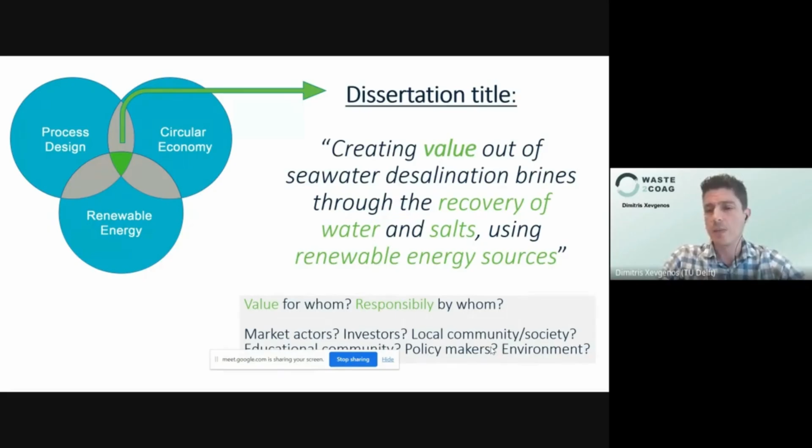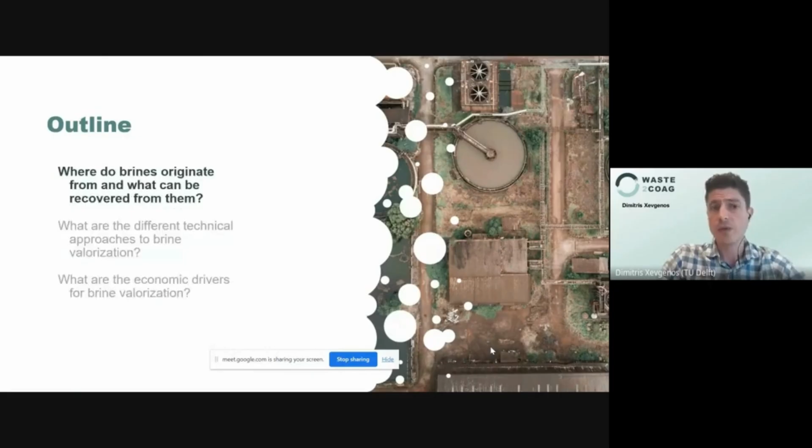Moving now to the outline of this presentation: I start with where do brines originate from and what can be recovered, what are the different technical approaches to brine valorization, and finally, what are the economic drivers for brine valorization.

Starting with the origination of brines, I use here a definition I like a lot, from WSSTP, now Water Europe, where Loïc also works, dating back to February 2012. They said that brine can be defined as water which has nearly reached saturation point with dissolved salt, so more than 50 grams per liter, and usually, but not exclusively, sodium chloride. Below 50 grams per liter, they refer to industrial wastewater, brackish water between 0.5 and 30 grams per liter, and saline water from 30 to 50. Above 50, it is a brine. This is a definition from Water Europe back in 2012.

And from the same publication, they talked about brine emissions in Europe.

Publicly available information for brine emissions from specific industrial sectors is limited, and that's still the case today - it has not changed since 2012. What they did, and I will show some results later on from my research, is use the predominant salt discharge, chloride, as a proxy to map brine emissions.

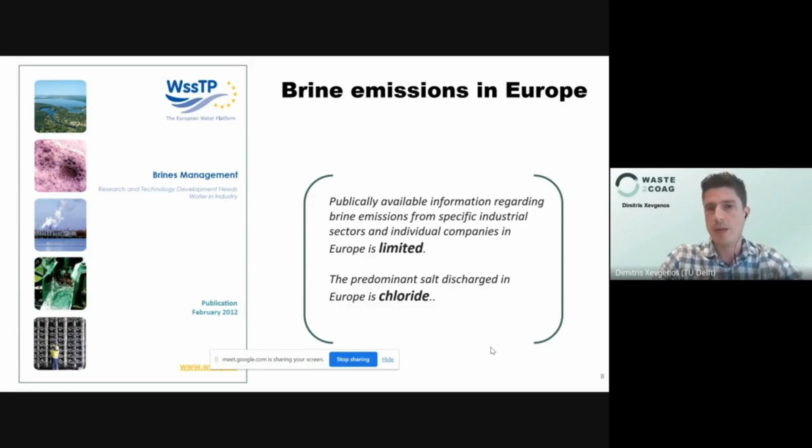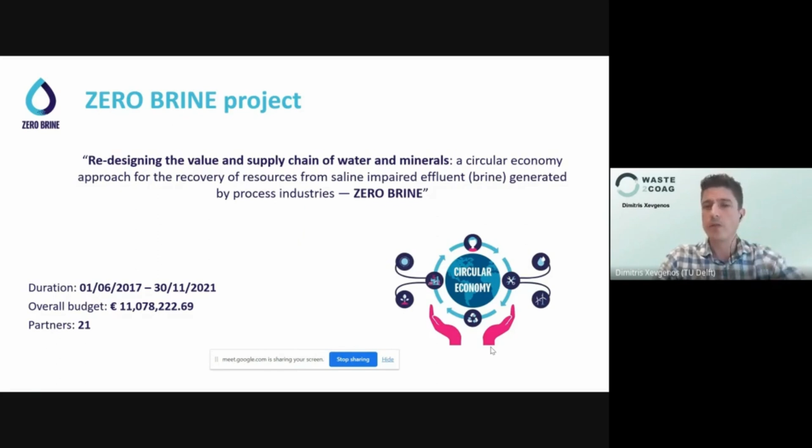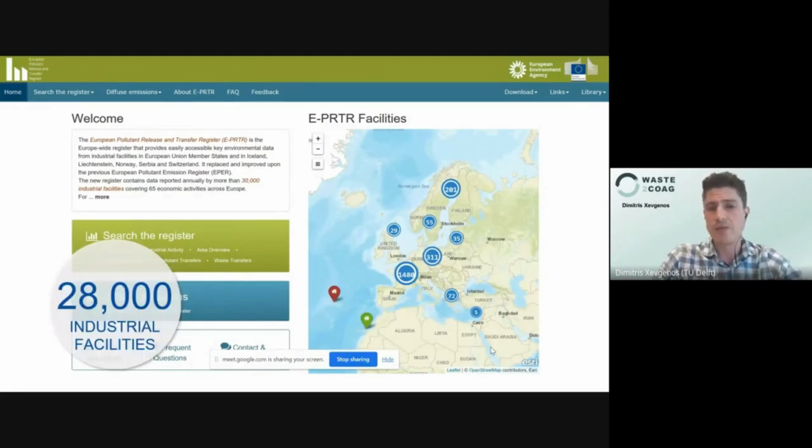I did that also in the Zero Brine project, a Horizon 2020 project that has been completed, and I will show you some results on the origin of brines. I used the European Pollutant Release and Transfer Register, the EPRTR, which covers 28,000 industrial facilities from 65 economic activities and 91 pollutants, one of which is chloride releases, as discussed from the Water Europe publication.

From a 2018 publication of mine, I mapped and quantified how many facilities in Europe are emitting chloride releases - 17 million tons per year. Where does this brine come from? Mostly from chemical industry, shown in blue, followed by waste management, mineral industry, energy industry, and others including production of metals, paper, and animal and vegetable products.

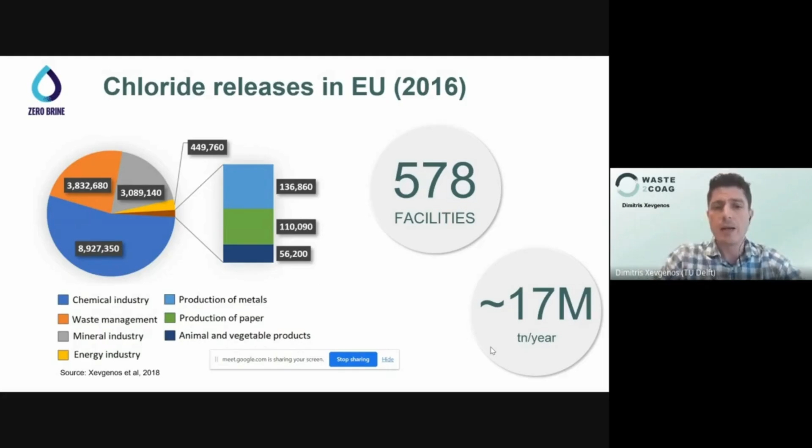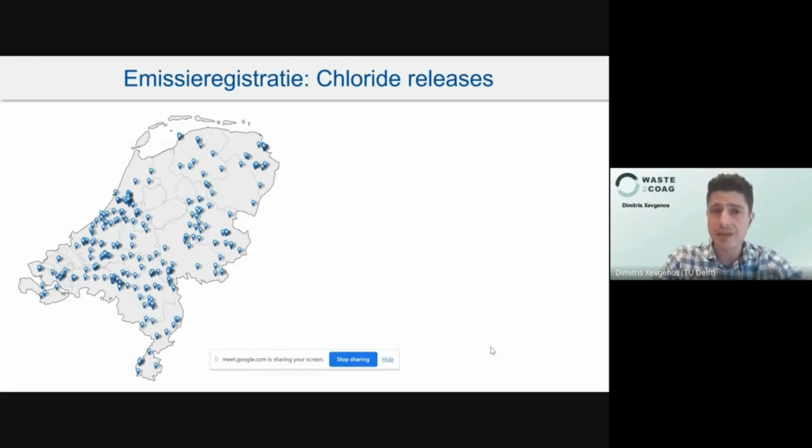I then went one step further to look at the Netherlands, because we have a very nice register there called emissieregistratie. I mapped all these brine effluents: 277 facilities, 870 kilotons of chlorides per year. Apart from the mapping, let's see what we learn from that.

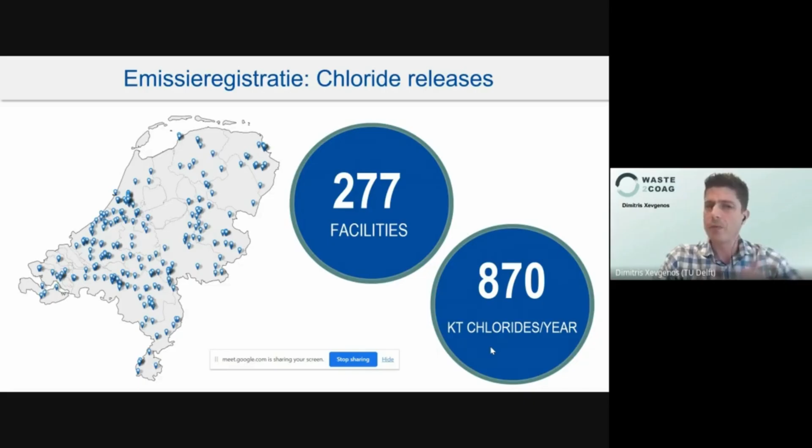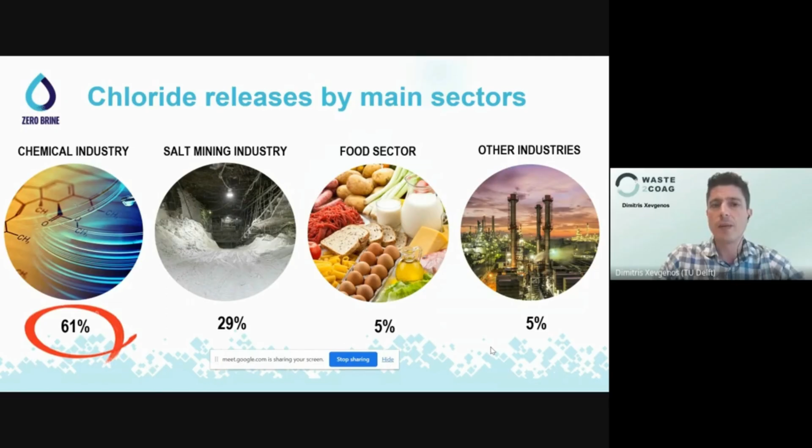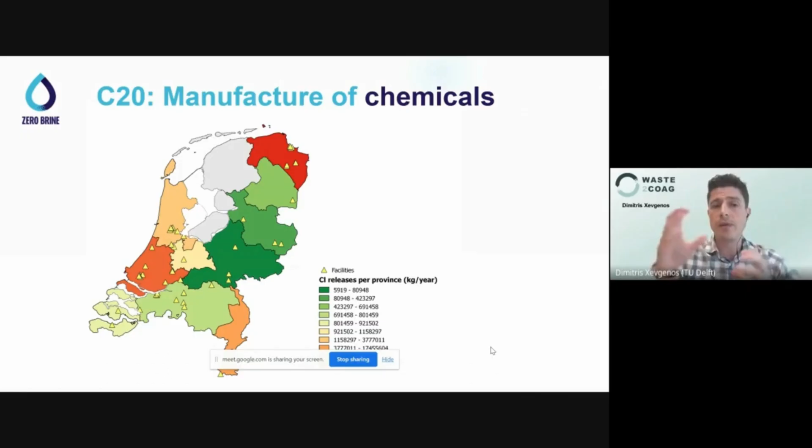Here are the four main sectors for the Netherlands. Chemical industry is again the biggest at 61%, followed by salt mining industry at 29%. But the interesting part for the chemical industry is something you will also see in one of my next slides - here is an illustration for the NUTS 2 regions in the Netherlands showing where the chemical industries are, with 54 facilities and their chloride releases.

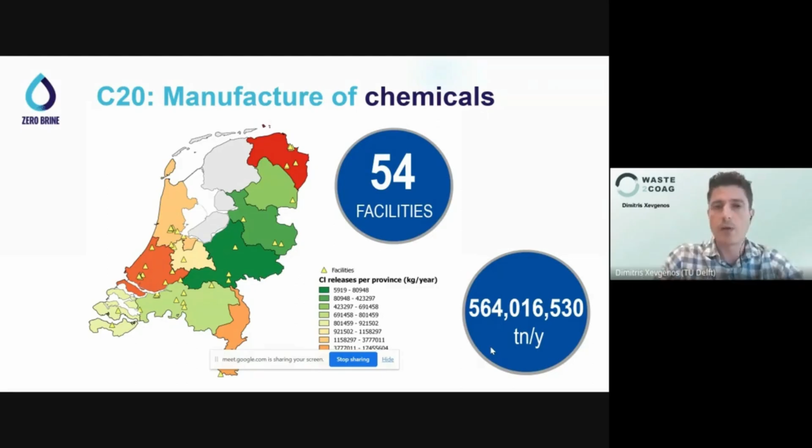After Zero Brine, we had a brine recycling in the chemical industry project that you will see in the second part of my presentation. So what are the different technical approaches to brine valorization? I will structure that within the project that is currently ongoing.

It's a Horizon 2020 project called Water Mining - Next Generation Water Smart Management Systems, Large-Scale Demonstrations for a Circular Economy Society. It's a large project of 19 million euro involving 38 partners from 12 countries, coordinated by TU Delft. The concept is that we see water throughout the value chain, either as a resource or as a product, and if a product, whether a consumable or durable good.

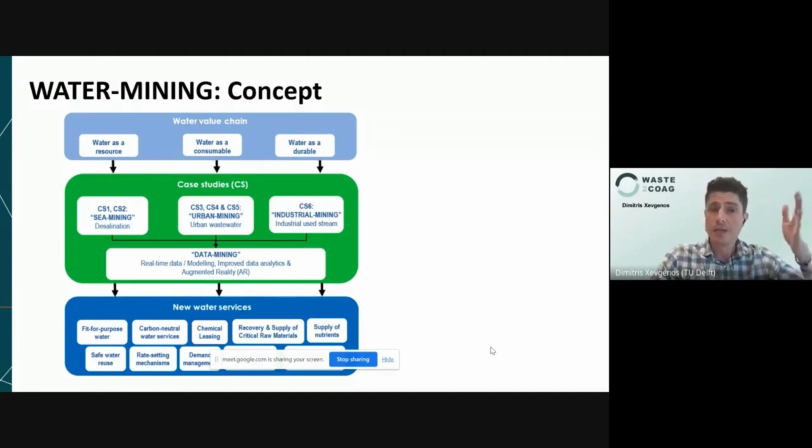We have established three lines of research and demonstration: seawater desalination brines is the sea mining, urban wastewater is the urban mining, and industrial wastewater is the industrial mining. I'm going to give you examples of the technologies from the sea mining and industrial mining groups. Starting with sea mining, here is a demonstration we did on Lampedusa Island, a small island below Sicily in Italy.

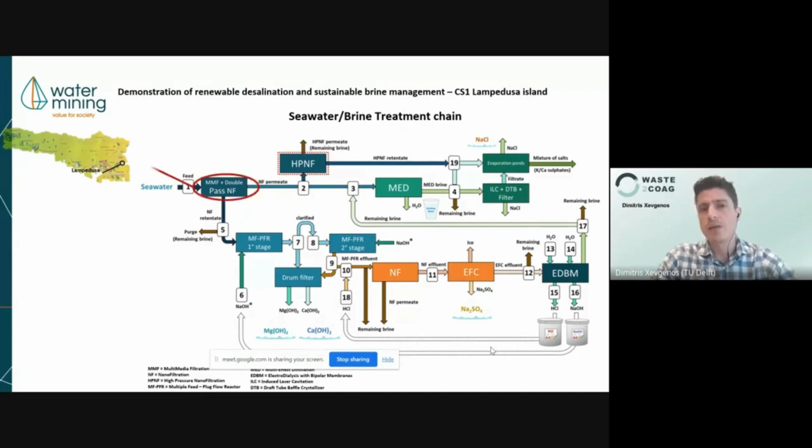Here is the technology, the treatment train. We have multiple technologies to recover resources from the seawater desalination brine. We start with double pass nanofiltration, a technology supplied by Lenntech, an SME. We separate the brine into a permeate and retentate stream, and I will discuss both now.

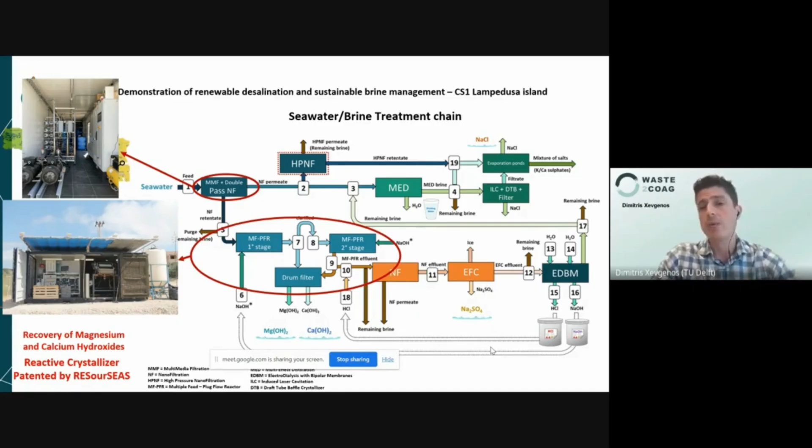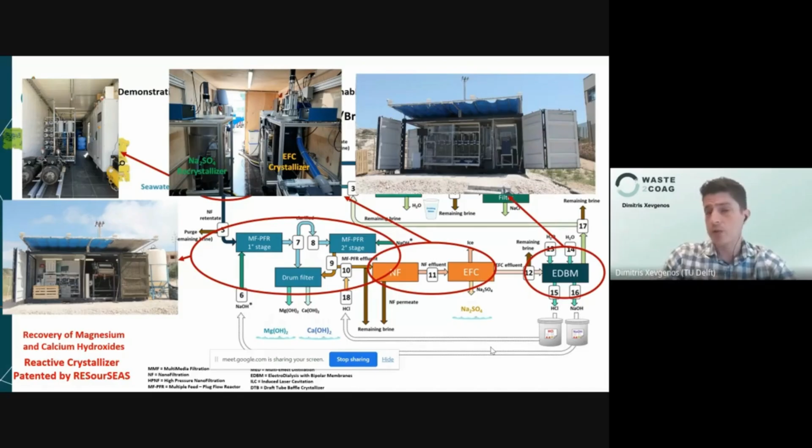Starting with the retentate, the brine coming from the nanofiltration, we have the multiple feed plug flow reactor, a technology patented by RESourSEAS, which recovers magnesium hydroxide with 99% purity and calcium hydroxide. Downstream, we have eutectic freeze crystallization, developed by us at TU Delft, recovering sodium sulfate. Further downstream, electrodialysis with bipolar membranes recovers hydrochloric acid and caustic soda.

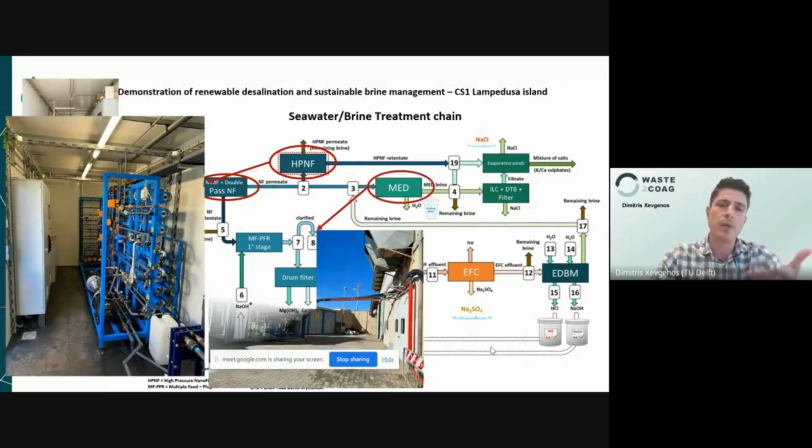In our case we just use that internally, but you can also use it externally. Now if we go to the upper part, in the permeate, we have high pressure nanofiltration and multiple effect distillation, which you can use one or the other depending if you want waste heat or electricity to drive the processes. Downstream, we have evaporation ponds or another crystallizer. So you can see here the complete treatment train we have already demonstrated in water mining.

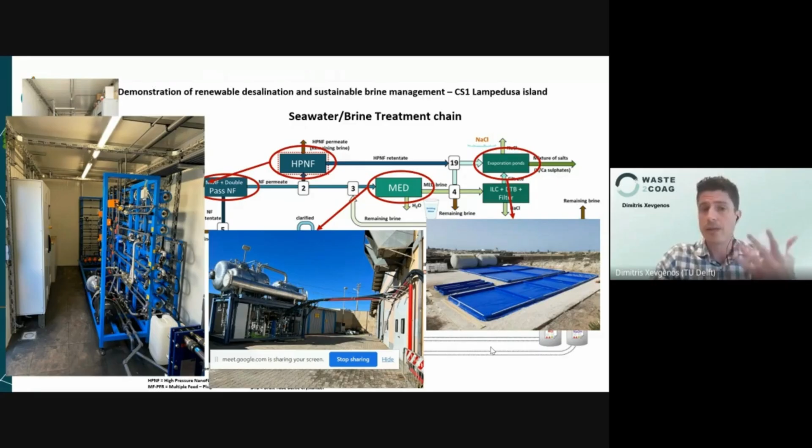You can see that this is pre-industrial scale, so it's not a low TRL, but already 7, 8. I will now move to the industrial mining cases.

We have in the chlorine sector in the Netherlands now an application. You can see here a map of Rotterdam Port where the chlorine sector is focusing. Nobian is the company that produces the chlorine, and they have 3 chlorine users downstream, one of them being Hexion, now called Westlake Epoxy. What we do is have full circularity, so we purify the stream and get it back to Nobian.

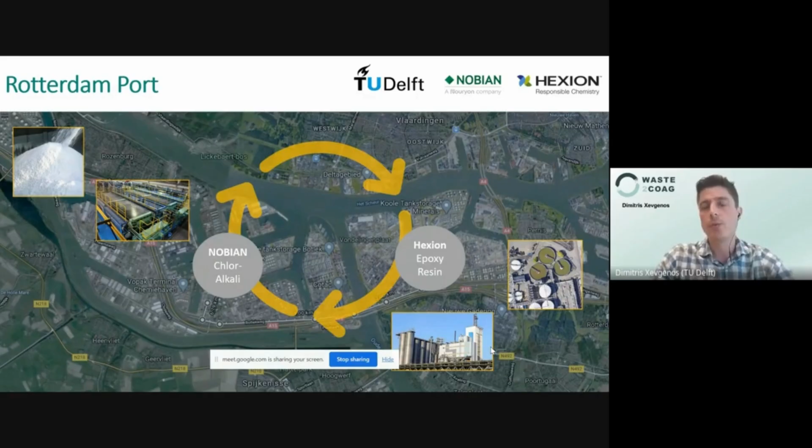The impact reduction is 30% of water consumption, energy consumption reduction of 25 megawatt hours, and of course 6 kilotons of CO2 are indirectly saved. It's full circularity - we have circular economy business model innovation through chemical leasing and no discharge.

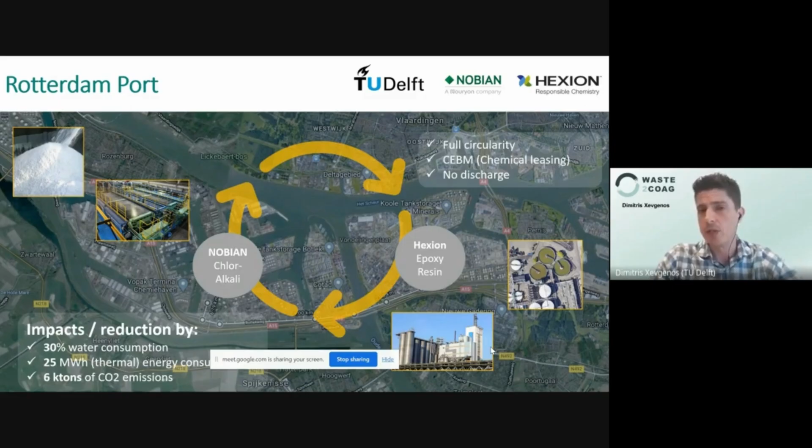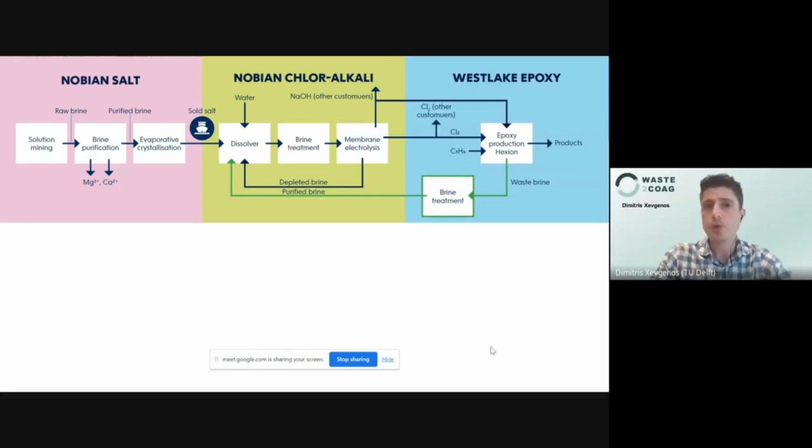Now, this is how it looks like. Nobian in the value chain holds also the salt production and the chlorine production, and downstream is Westlake Epoxy. What we do is purify the brine and take it back to Nobian. The TRL is 7.

I'm not really allowed to give a lot of details about the technologies, but maybe we can discuss this if there is any question in the Q&A. What are the economic drivers for brine valorization now? This is the last part of my presentation.

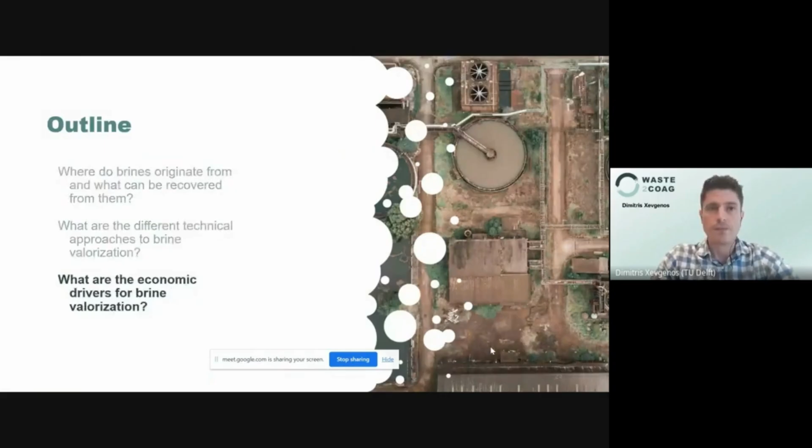Recovery of secondary raw materials, which in certain cases, or in many cases, can be the main product recovered, with water being a byproduct. And I don't mean that in terms of volume or mass, but in terms of value that you can capture. Reduction of environmental fees.

Sometimes there are cases where they're paying a lot of fees, and this can be a driver to adopt a circular economy solution.

Creation of new business opportunity. What I mean here is that there are industries that want to expand their production capacity, but they're being limited by the effluent limits. We had such a case study in the Zero Brine project.

And then establishing local value and supply chains, safeguarding access to raw materials. This is also very relevant for us in water mining. We have islands where they are sourcing chemicals or other materials outside their territory. They had experienced disruption of the supply chains affecting the economic activities. So that could be a very nice way to get these materials from seawater.

Conclusions: brines can originate from industrial processes as well as from seawater desalination plants. For industrial processes, chloride releases can be used as a proxy to get some insights per sector, and we can do that by using emission registers. I showed you how you can use the EPRTR, or Emissieregistratie for us in the Netherlands, but still information on industrial brine emissions is limited.

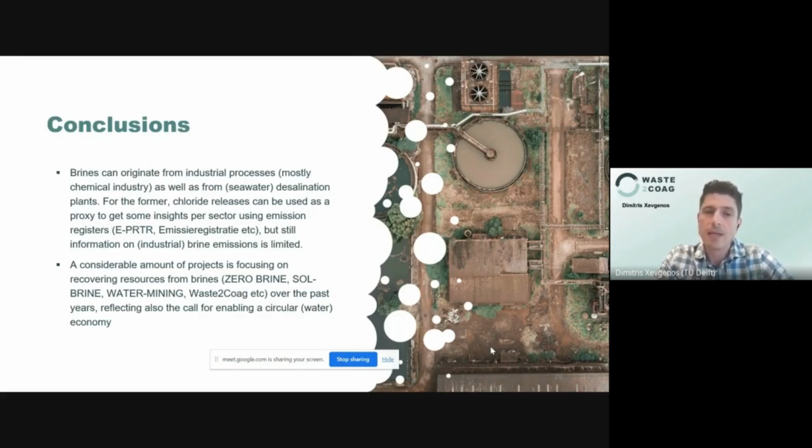A considerable amount of projects is focusing on recovering resources from brines. For example, I showed you the Zero Brine and the Water Mining project. Of course, Waste2Coag is another one, over the past years, reflecting also the call for enabling a circular water economy. So that was my presentation. Thank you very much for your attention.

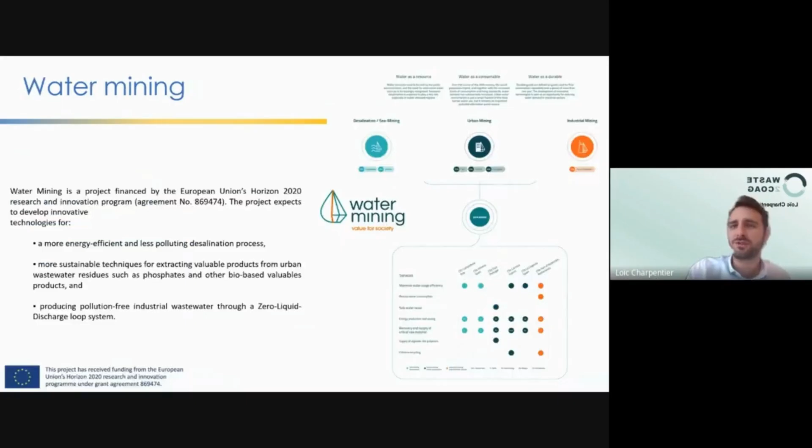I will skip this slide because Dimitri did a very good job, so I don't need to go too much into this example, and you know it far better than me.

But you asked me what is the best option for brine, to prepare this presentation, and I will conclude with an article done by a professor at the University of Las Palmas de Gran Canaria. He explained that the most important thing is to have a strategic approach for brine management, and I agree that water-related topics are really fragmented in Europe, and the solution needs to be adapted to local situations.

That's why it's important to have water-oriented living labs, for example, but also important to maintain technology neutrality in legislation. You cannot push for one best technology, because sometimes the best technology will be different from one region to another, from the north to the south.

If you check the seven parameters for a strategic approach to brine management, particularly in Las Canarias or island regions, you see the red boxes touching several legislations. For circular economy, you have the Circular Economy Action Plan, and also the Resource Recovery Action Plan that is coming up.

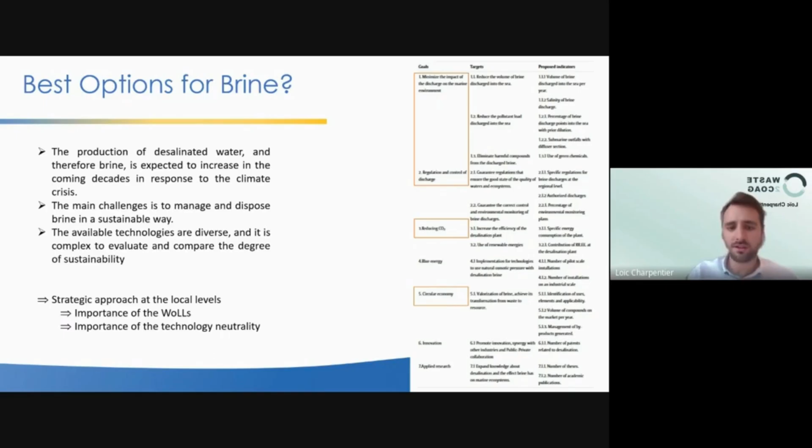The legislative landscape is also fragmented, but it can open new opportunities. I would say the most important thing is to remain technologically neutral and to have the full picture when discussing brine management and disposal. And I think I'm also good with the timing.

Yes, Loic, you were also spot on. Thank you very much for your time management, and for providing this digested overview of the current policies in Europe, which is always really useful for us to see. I take the key message from you about looking at more appropriate technologies rather than the best technologies. There's not a best technology that's going to fit all. Totally agree with that.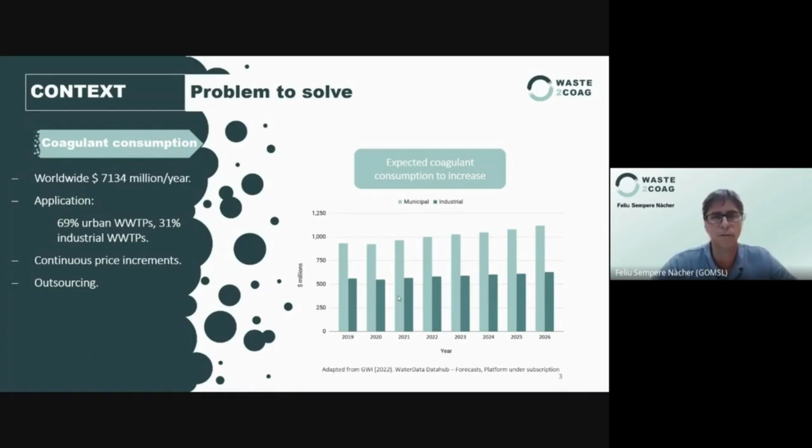Regarding brine disposal, Dimitris already gave some numbers, and indeed, only from desalination plants there are 142 million cubic meters per day, with 80% of the production and release of these brines below 10 kilometers from saline water bodies. But 15% of this brine disposal is 50 kilometers away from saline water bodies, especially in countries like China, the United States, and Spain.

As we have seen, the concept of our previous research and development projects is the valorization of brines and metal wastes into coagulants to be used in wastewater treatment, either urban or industrial, using an electrolytical technology. These previous works were carried out by Global Omnium together with AIDIMME, which is also a partner of LIFE Waste2Coag, and involved a laboratory reactor from 1 liter, and also a pilot scale reactor scaling up the previous results to 100 liter capacity.

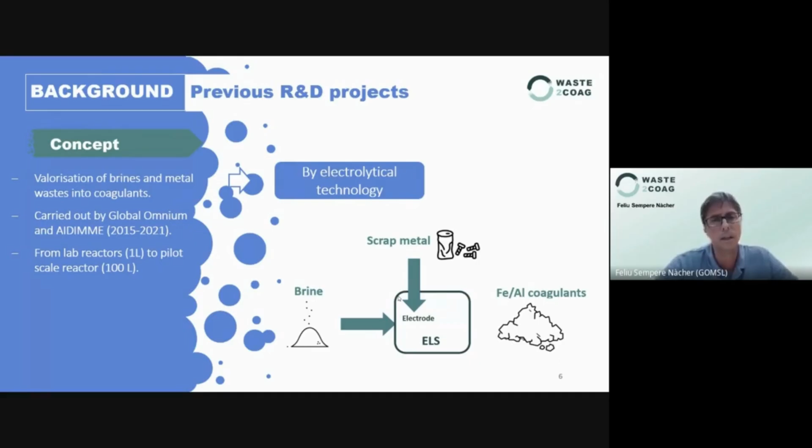Just to mention the electrolysis concept: it is to apply a continuous electrical current to two metal electrodes immersed in a solution to cause a non-spontaneous chemical change. If we use an anode, an electrode of steel, we will produce an iron-based coagulant, which is a substitute for commercial ferric iron chloride salts. And if we use an aluminum electrode, we will substitute commercial PAC using an aluminum-based coagulant.

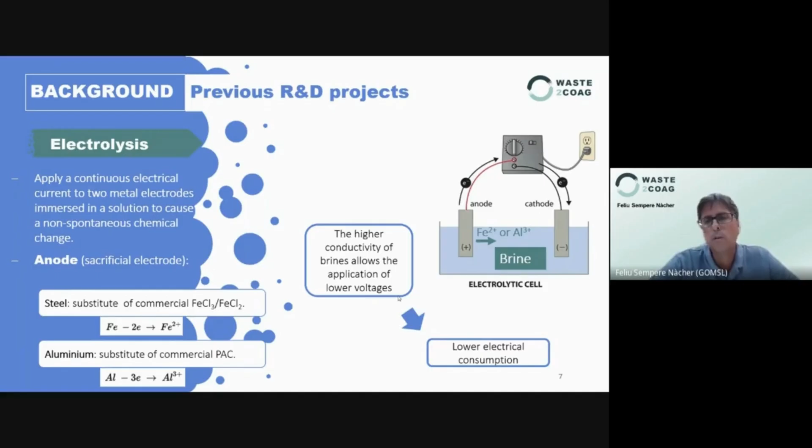What we do using brines is take advantage of their higher conductivity, which allows us to apply lower voltages. This results in lower electrical consumption than if we used other types of solutions.

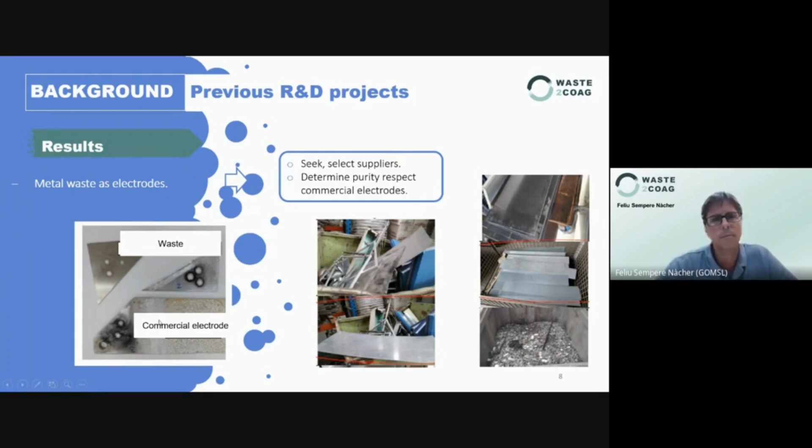Some previous results: we sought and selected several suppliers of metal waste and also selected different metal wastes as an alternative to commercial electrodes, as we see here in the image below. We also characterized different brines from drinking water facilities, as Global Omnium operates integral water cycles.

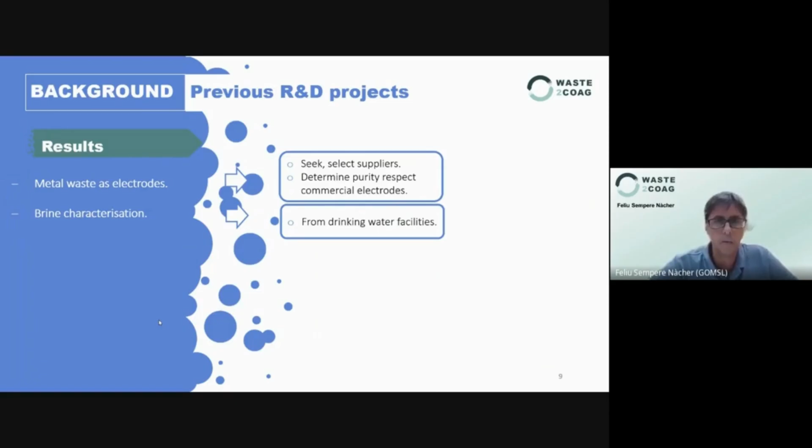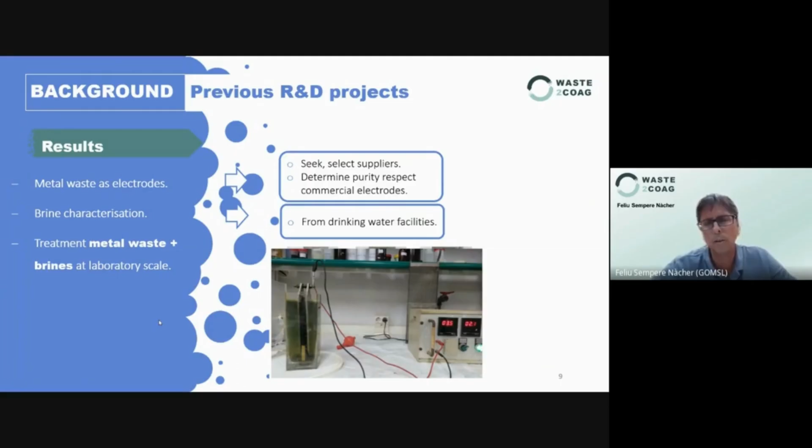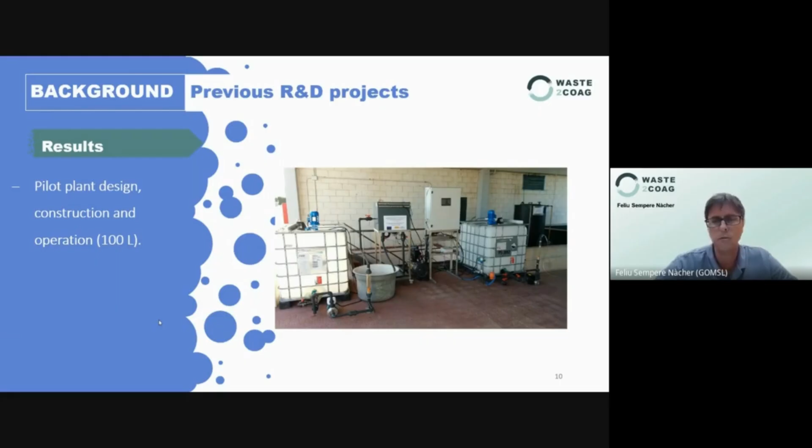So we also operate drinking water facilities, and we treated these metal wastes and brines at laboratory scale in AIDIMME's facility with the reactor we see in this picture. Finally, after the previous results at lab scale, we designed, constructed, and operated a 100-liter pilot plant unit, which we see in this picture, installed in a wastewater treatment facility in Canet.

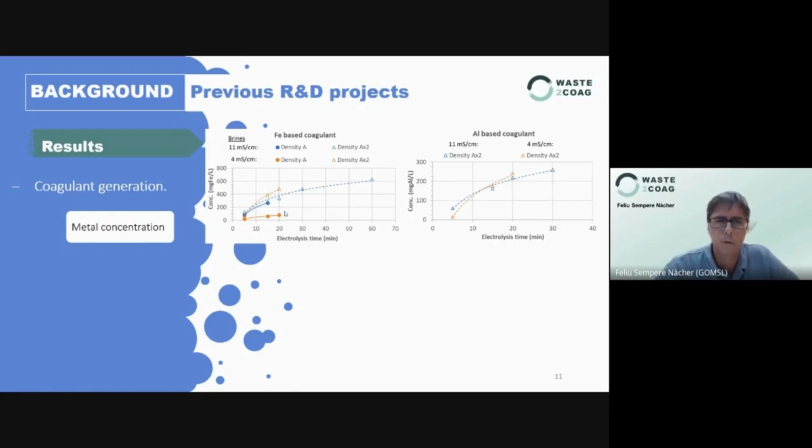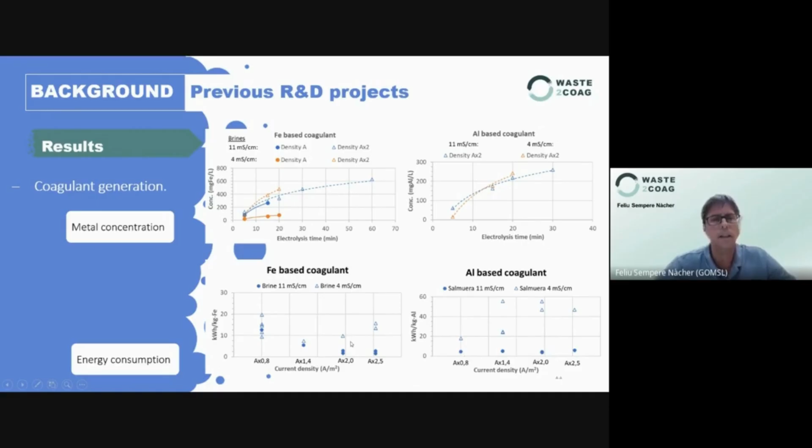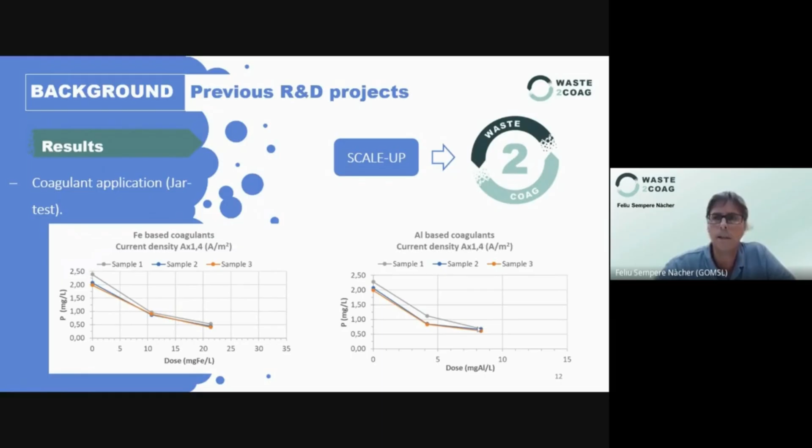With these good results, we decided to scale up this concept, which became the LIFE Waste2Coag proposal, awarded and started in October 2021 with partners including AIDIMME Technical Institute, Joviar, a small-medium company of the metal sector, ISLE Utilities, which is organizing this webinar, and also the water utilities, Aquafin in Belgium, and Global Omnium Medio Ambiente.

The overview and current status of the project started with obtaining the administrative permits, the design, construction, and commissioning of the prototype. Now we are currently in the optimization of the prototype operation with the coagulant production based on treating different brines and applying different conditions.

We are expecting, once we finish producing the coagulants at the optimized operational conditions, to apply them during jar tests. Finally, once the system is optimized, to validate the coagulants in an urban wastewater treatment plant in Gandia, Spain, replicate the system by sending the technology to Wulpen in Belgium, and also operate the plant in an industrial wastewater treatment plant in Joviar, the industrial partner.

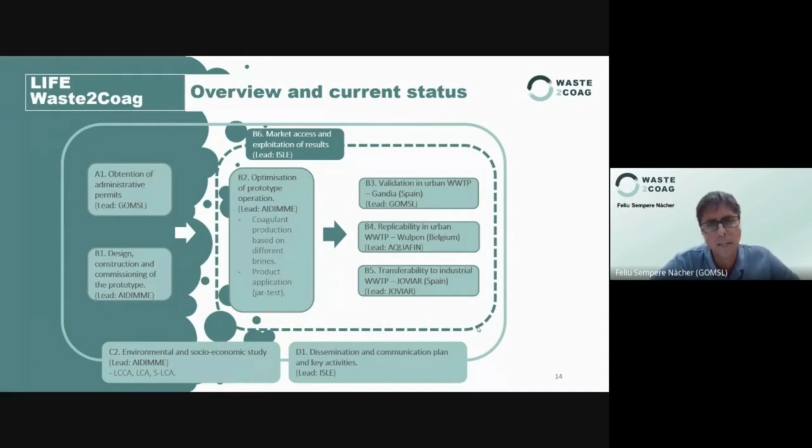ISLE is leading the market access and exploitation of results, and then the actions are completed by the environmental and socioeconomic assessments, dissemination and communication activities, and also the monitoring of the impact of the project's actions and the coordination of the project itself.

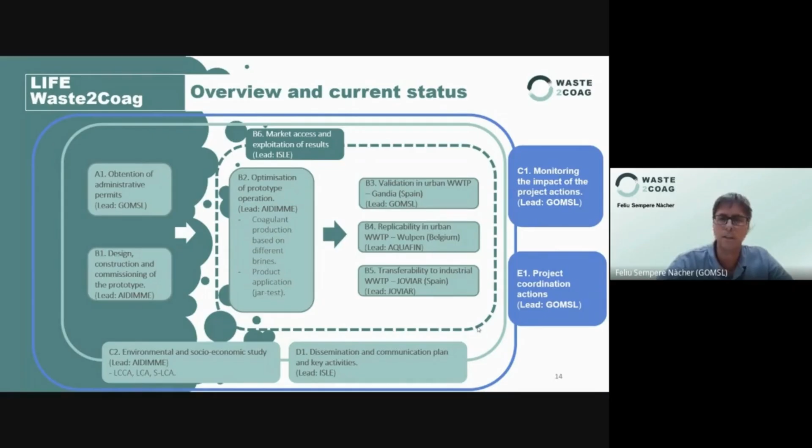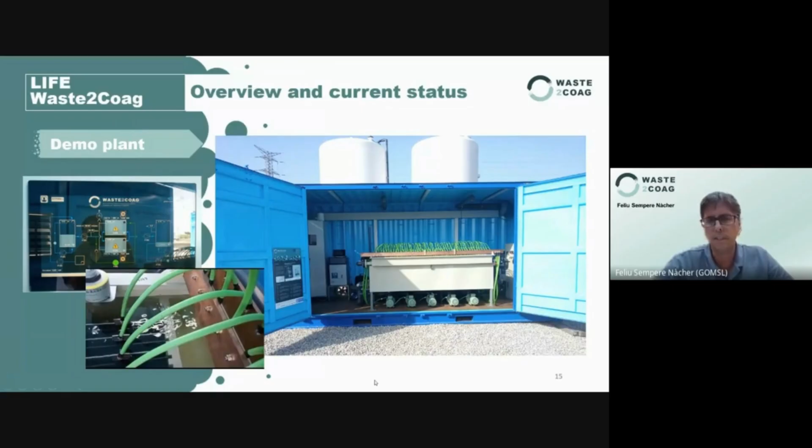Here we have a picture of the constructed pilot plant and also the human-machine interface, and a short video with the commissioning of the installation. We just started to operate this month of June.

As mentioned, it will be installed in 3 sites. The first one is Gandia, an urban wastewater treatment plant located next to the Serpis River. Now it's not discharging to the river, but it's expected in the future to be an option, as happened in the past, where we will expect lower limits on phosphorus emission. This wastewater treatment plant receives brine from 3 industrial companies, around 25 cubic meters per week, brines with different conductivity values, from cleaning, textile, and disinfection products companies.

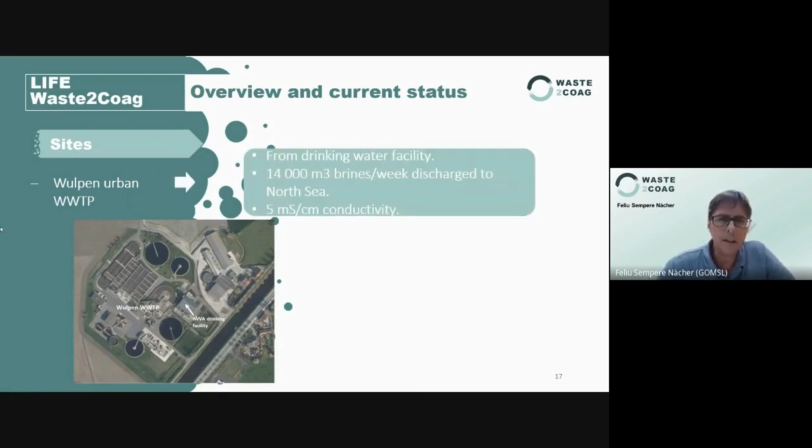Later on, in Wulpen, Belgium, we will install the plant in a wastewater treatment facility located next to a drinking water facility, but by saying next, it's 10 meters away, which discharges around 14,000 cubic meters of brines per week to the North Sea without valorizing them. Brines with lower conductivity than the industrial ones we receive in Gandia.

Finally, Joviar is generating brine from the production process with a smaller amount, 1.5 cubic meters of brines per week, but with a high conductivity value.

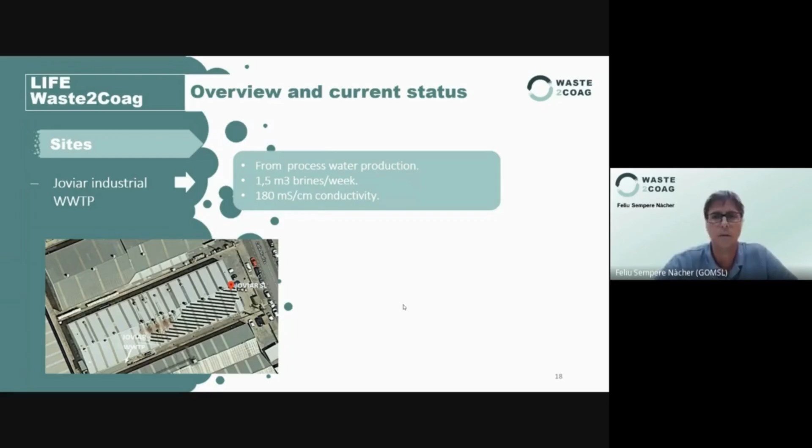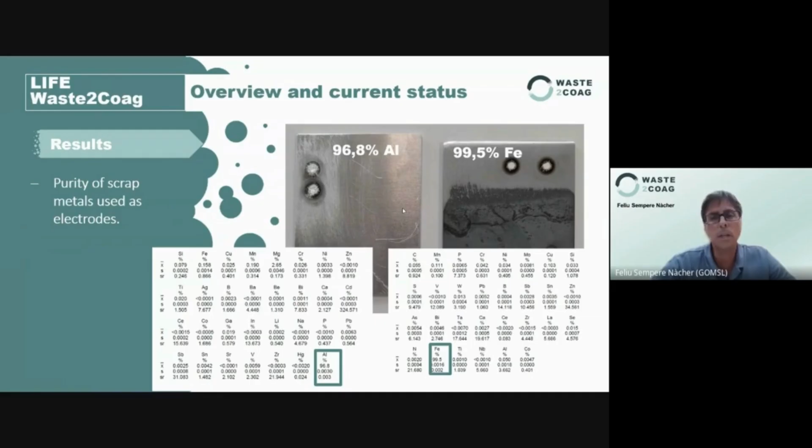The initial results: we checked the purity of the scrap metals used as electrodes, as we see in these pictures, where we saw that the metal wastes contain high purity of both aluminum and iron, sometimes higher than commercial electrodes. Comparing to the previous results on the left, we have the new ones on the right, applying different current densities.

We are increasing the metal concentration compared to previous projects, reaching values around 1,000 milligrams of aluminum, which was one of the objectives, to valorize as much as possible every cubic meter of brine into a coagulant.

Also, because of the high conductivity, around 180 millisiemens per centimeter of the brines treated, we are also decreasing the energy consumption per kilogram of aluminum. Just to mention, these are values of the applied current into the rectifier, into the electrolytic reactor.

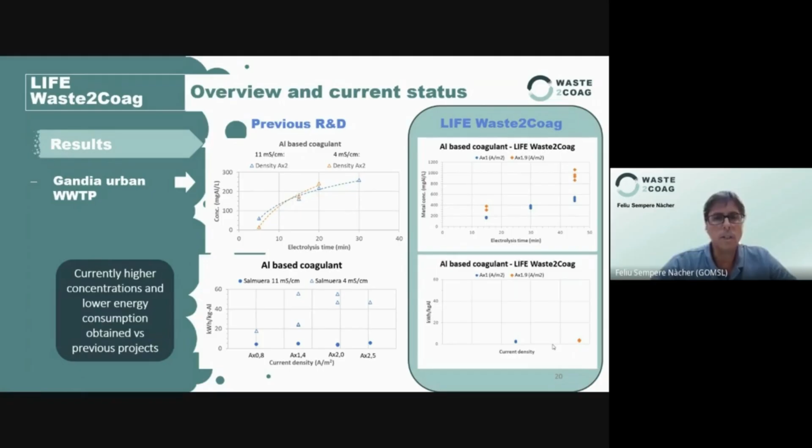So, currently the previous results are being optimized with lower energy consumption than obtained previously. What we are looking for is to test different types of brine and process them in the demo plant. We are also looking to apply the alternative coagulants that we will be producing, treating different wastewaters.

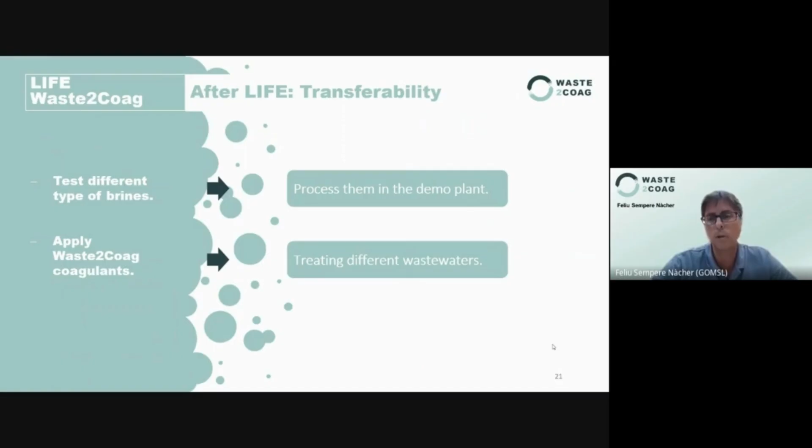For that, we look for networking with different stakeholders, and we take this opportunity from the webinar to encourage all of you to contact us via email, our webpage, or our social networks.

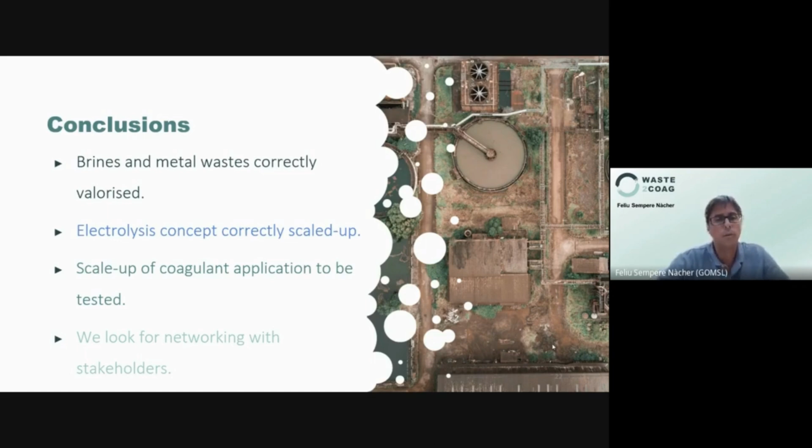The next step is to scale up the coagulant application to be tested after the jar test experiments, and we look for networking with stakeholders, as I just mentioned.

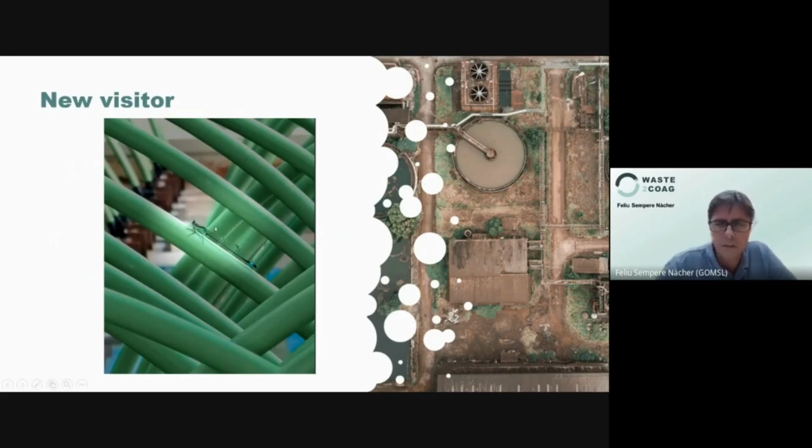And finally, just as a nice picture, we are also having visitors in our electrolytic pilot plant, as we see here - I don't remember the name now, the dragonfly, I think it was. And with this, thank you for your attention, and I'm open to any questions that you might have.

Okay, thank you, Feliu, and thank you for the photo of the new partner in the project. You're welcome, it shows that the system really is environmentally friendly. It is great.

Okay, yeah Chris, thank you. Damsel fly, so this is the name.